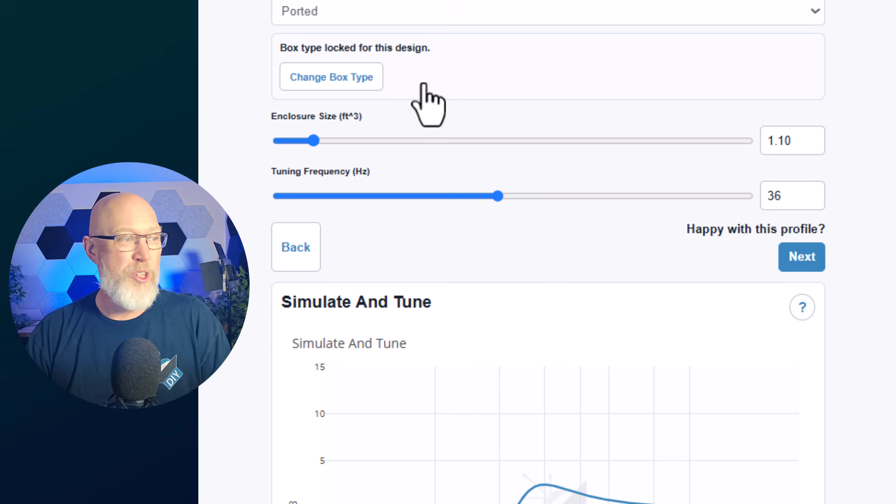If you're not sure if you've picked the right one, you can always just click on one of these links right here and it will take you to a vendor page where you can verify that you've selected the right subwoofer. Then we hit next. That puts us in step 3 where we can simulate and tune the subwoofer. We can choose a ported or a sealed enclosure. I'm going to go with a ported enclosure because this is an Aero-Port subwoofer enclosure tutorial, and I'm going to choose simulate and tune.

Then I'm going to take the enclosure size and I'm going to bump it up, and as you bump up the enclosure size, this graph right here goes up, so the subwoofer is getting louder as the enclosure gets bigger. I'm going to go with 3 cubic feet for a pair of 10-inch subwoofers, and then take the slider right here and I'm going to tune it a little bit lower so we can get some low-end extension. The thing to keep in mind about this is as you tune lower, the ports are going to get longer, so maybe more difficult to fit the port in the enclosure.

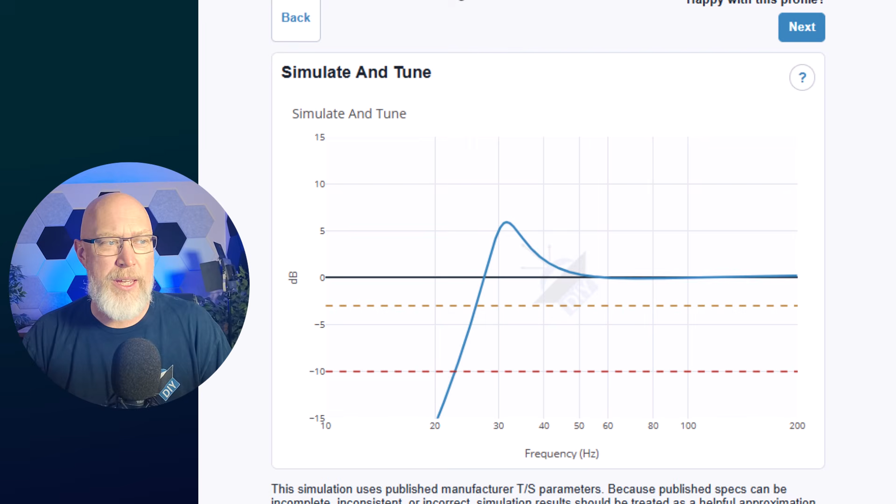As the box gets smaller, the port will get longer. That makes it more difficult to put the port in the enclosure. So what I recommend that you do is oversize the box a little bit so you can have room for your port, and maybe you'd like to tune it to 30 hertz, but maybe back it off just a little bit so you can make sure that you can fit the port in the enclosure later.

Then we hit next, and now we have this screen right here, which has given us a power estimate. This is 80% of the rated power of the subwoofer. We can raise or lower that if we want to, but the standard is to use 80%. And then we have a port area in square inches. The thing to remember is as the port area gets bigger, you can see here on the graph, your port velocity goes down. So you want a large port to prevent chuffing.

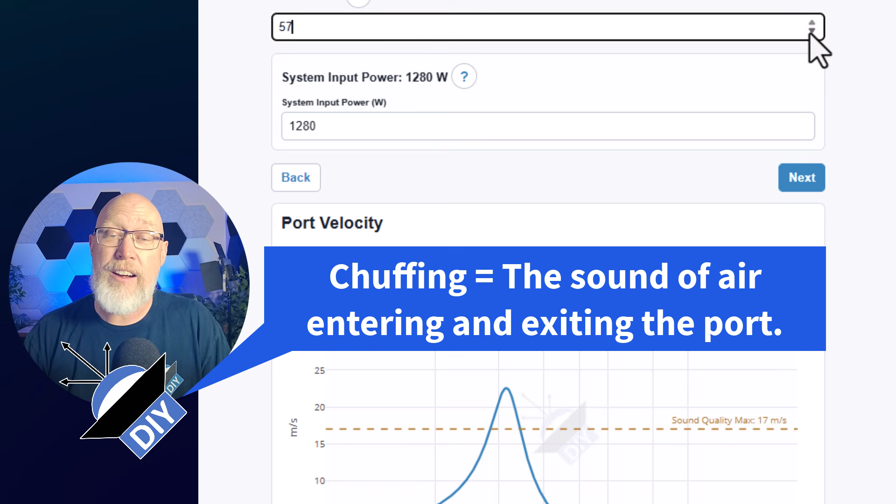But we're using an Aero-Port, a flared port. And the beauty of a flared port is you can get away with a higher airspeed velocity without having any audible chuffing. The general rule of thumb is for sound quality, you want to keep it below 17 meters per second. For your daily driver build, you want to keep it below 34 meters per second. And with an Aero-Port, you can double those numbers. So you can lower the area of your port and get away with a higher port airspeed velocity. That is the beauty of the Aero-Port.

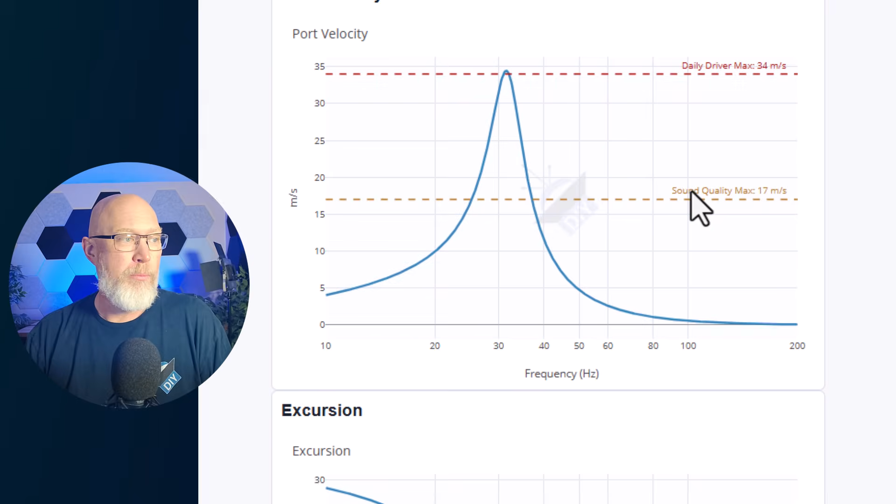Below that is a plot that shows your excursion. We're interested in this point right here, which looks to be about 26, 27 hertz. So any frequency below that, our subwoofer is going to go beyond its X-max and we might hear some distortion. That's easy to fix. We'll just turn on the infrasonic filter on our amplifier. Almost every subwoofer amplifier has an infrasonic filter.

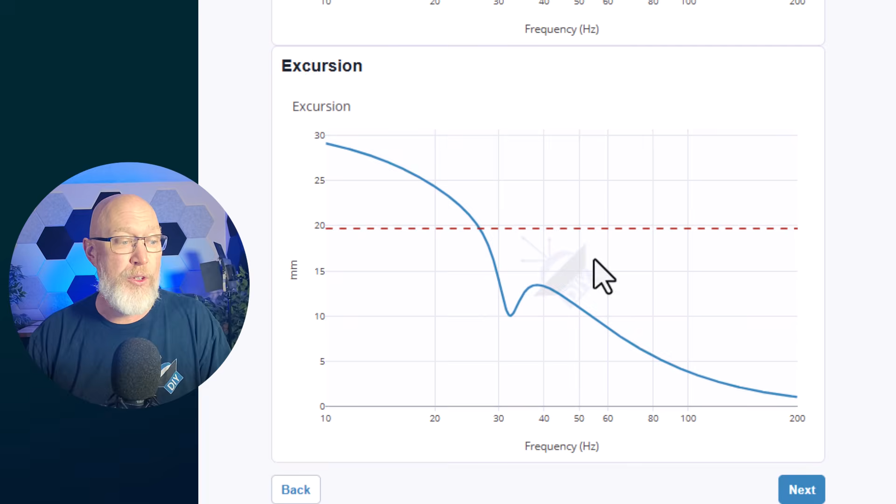We hit next and we get a nice summary page of what we just saw, along with an SPL plot, our excursion plot, and our port velocity plot again. Key numbers on this plot right here. The most important one is the F3. That's the point where we're down 3 dB from flat. That's going to be at 26.7 hertz. This screen's also going to show us a port length, so we're going to need about a 23.5-inch long port. That's important information because we're going to have to decide on a width of our box.

So let's hit next, and that kicks us into stage 2 of this system. Stage 2 moves us from simulate and tune into building your blueprints. So we're going to go through a simple step-by-step process. When we're done, we'll have a set of blueprints in our email inbox. We have 4 options here.

We have 2 slot port options, and then we have 2 side firing round port options. We're going to go with the Aero-Port option. I'm going to double up on the baffle because I just like doubling up on the baffle. We have spacing options. We can space them tight together or we can stagger or offset them, but the system is designed to override our spacing options if we have to make the ports fit in the enclosure. So all that looks good to me.

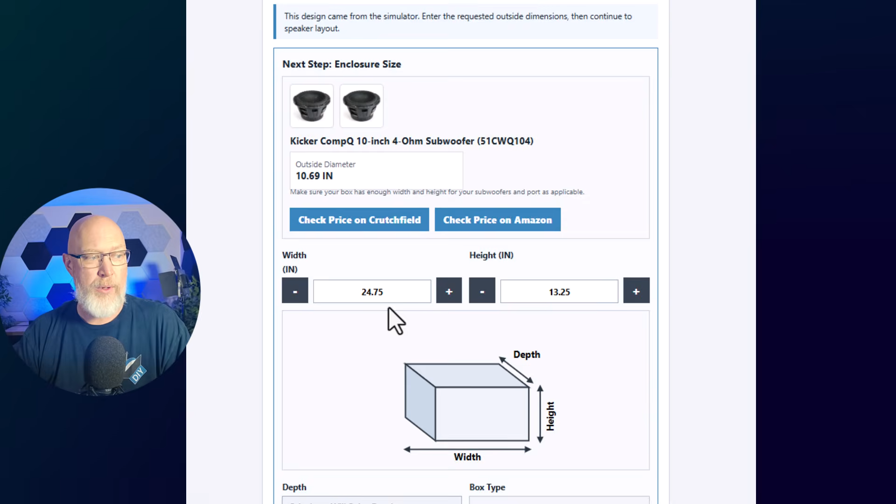I'm going to hit next and enter my enclosure size. It's already defaulted to a width and a height. Those are just guesstimates. They mean absolutely nothing. I know I'm going to need more than 2 feet in the box, so I'm going to go ahead and bump that up to 30 inches. My subwoofers are 10.69 inches in diameter, so I know I need to have 11.5, maybe 12 inches at a minimum to fit the subwoofer. I'm actually going to go with 14 inches.

The airspace came over from Simulate and Tune. We can adjust it now if we want to. The tuning frequency was brought over from Simulate and Tune. We can adjust that if we want to. And the port area in square inches was also brought over from Simulate and Tune. Again, we can adjust that if we want to. The system has estimated the amount of airspace that our subwoofers displace in the enclosure, and this system is designed to take that into account, as well as the space taken up by the ports and any bracing you might add to the enclosure. We hit next and we wait and see what happens.

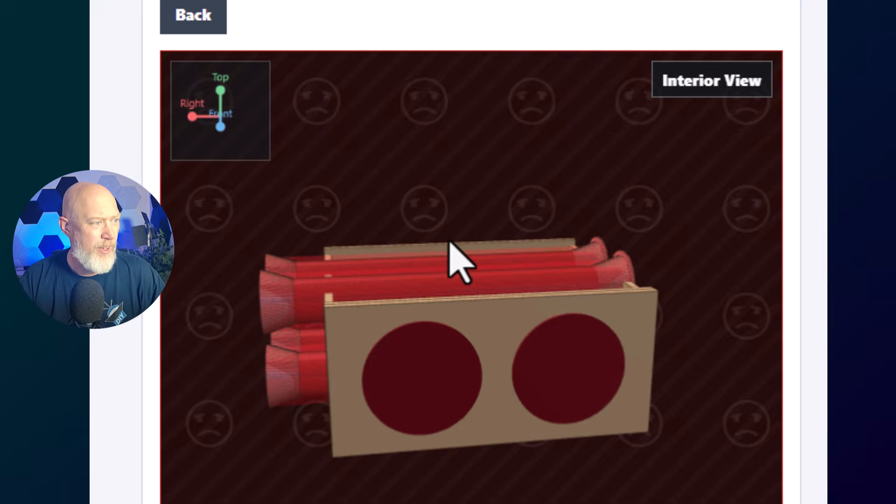And we have a problem. This system is designed to catch problems. The issue here is that even though we know we need about 2 feet worth of pipe, we're going to be putting big flares on this pipe, and those flares take up extra space. So we don't have a box that's wide enough to fit our Aero-ports. And we get a nice 3D visualization of that, and we can see the ports sticking out of the enclosure. This tool is designed to give you the information you need in order to solve this problem, and one solution is, instead of using 4 4-inch ports, to try 1 6-inch port. So we can just choose 1 6-inch port. Now if we go with that option, we're only going to get 28 square inches of port area.

Let me back up and explain what's going on. The system tried to put 4 ports inside of the enclosure, and when you put 4 ports inside of the enclosure, each port is going to tune 1/4 of the enclosure, meaning each port is only going to see a very small airspace. And as the airspace gets smaller, the port has to get longer. So those ports ended up excessively long because there were many of them, which meant they couldn't fit in the box. The solution is to use 1 larger port, but there was a big trade-off to switching to 1 larger port. That 1 big port didn't give us the cross-section that we were hoping for. So we had to make a choice.

And while that might not be an optimum design, that does tell us something really important about designing subwoofer boxes and life in general, and that is that there are no solutions. There are only trade-offs. There's no such thing as a perfect subwoofer box. What you can do is get the best box possible given your set of constraints. That's the design philosophy behind this tool. You input a set of constraints like the width and the height and the airspace and the tuning frequency, and this tool will give you the best box possible given those constraints, which is less than we wanted, but it will fit in the enclosure.

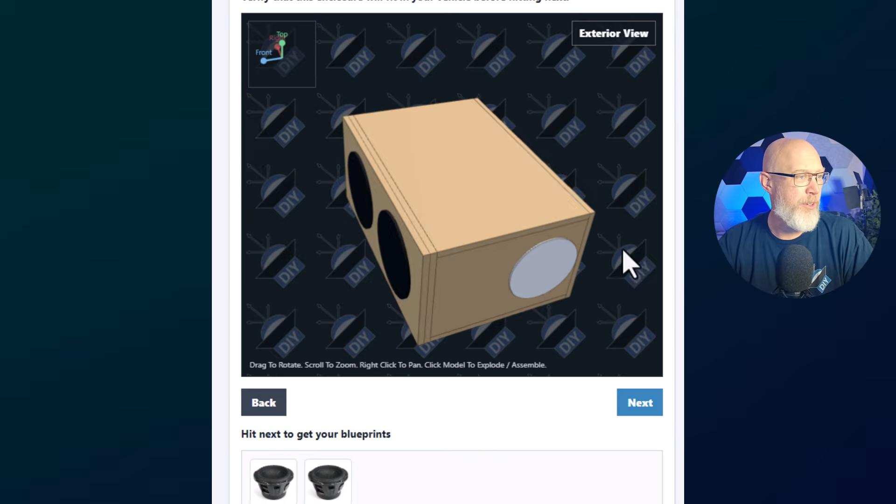Before moving on, I want to point out the dimensions of the enclosure. It is 30 inches wide, 14 inches tall, and 21.25 inches deep. So before you go to the next step, you want to make sure that this subwoofer box will fit in your vehicle. If it won't fit in your vehicle, then don't move forward. Go back and try to design something that will fit in your vehicle. Let's hit next and see what happens.

The system is going to email the plans to you, and in just a minute, those blueprints will show up in your inbox. Before we look at the plans, stop and take a look at the timestamp on this video. The design phase took just a couple of minutes. If you were to try this with pencil and paper and a calculator, it would take you hours. Let's check out the plans. Here are your plans.

Now that you've got your plans, you want to make sure you take some time to make sure the plans make sense to you and that you know what to do before you start cutting wood. Because the worst outcome is to cut wood and build something that doesn't work. So let's scroll down through the plans and take a look at them.

The first thing it's going to give you is a project overview. Review all of that and make sure it is what you are looking for. It's going to give you some 3D views so you can get an idea of what it will look like once it's assembled. It's going to list your subwoofer

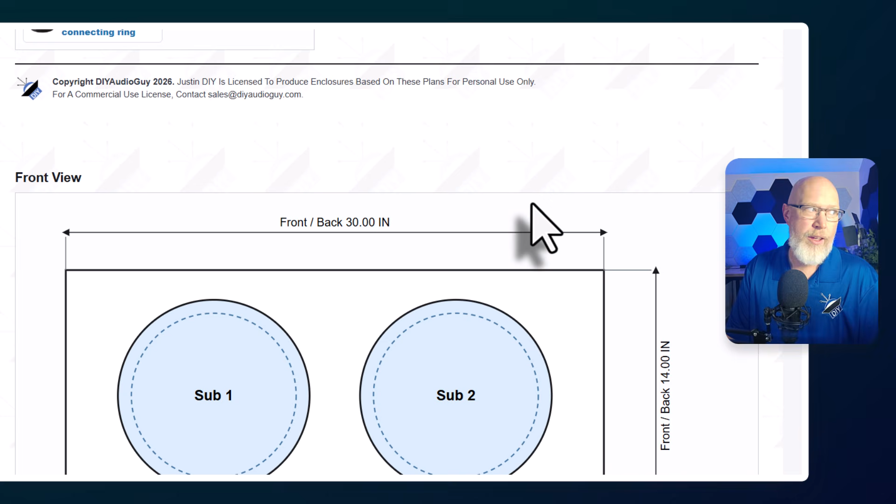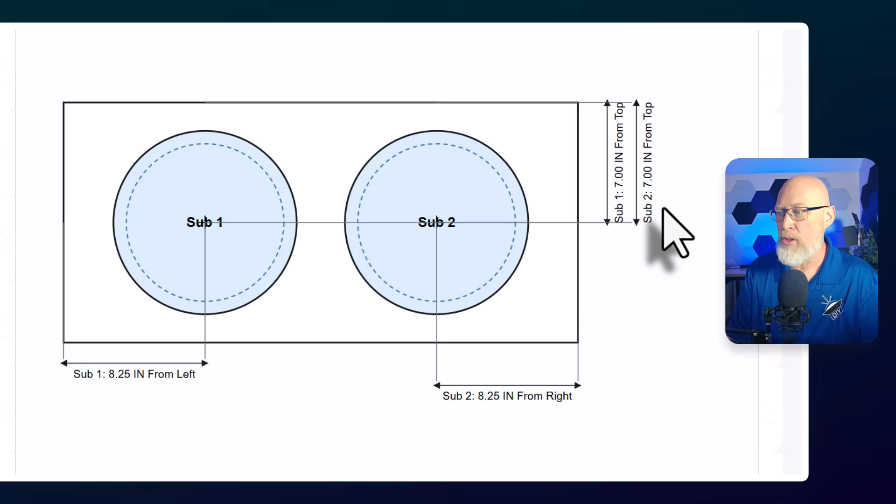The first thing it's going to do is give you a front view and it's going to show you the size of your baffle. In this case, we're going to have 2 baffles, so there'll be 2 30 by 14 inch pieces. The next view is going to be the exact same view, but it's going to show you suggested speaker placement. This is merely a suggestion. You can put these anywhere you want as long as you have room for them.

Before you cut the holes for your speakers, I recommend that you do a test cut on some scrap material. I have found that speaker cutout dimensions are oftentimes wrong, so double check them before you start cutting. That's the most important lesson of the day, is double check before you start making sawdust.

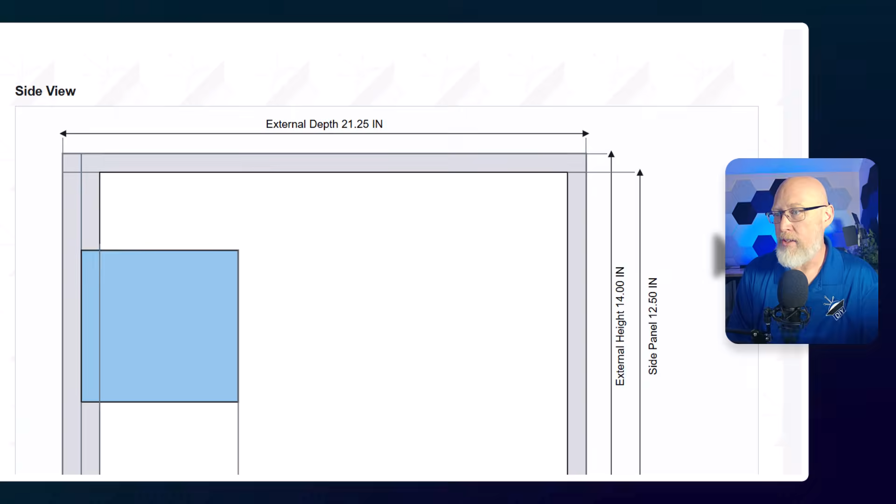This is the back view, and in this case the back view is exactly the same as the front view minus the speakers. It's a 30-inch wide by 14-inch tall panel, so you'll cut your back panel 30 by 14. Here is a side view. The side is going to show you the depth of the subwoofer into the enclosure. The gray area on the side view represents pieces that you can see when looking at the side.

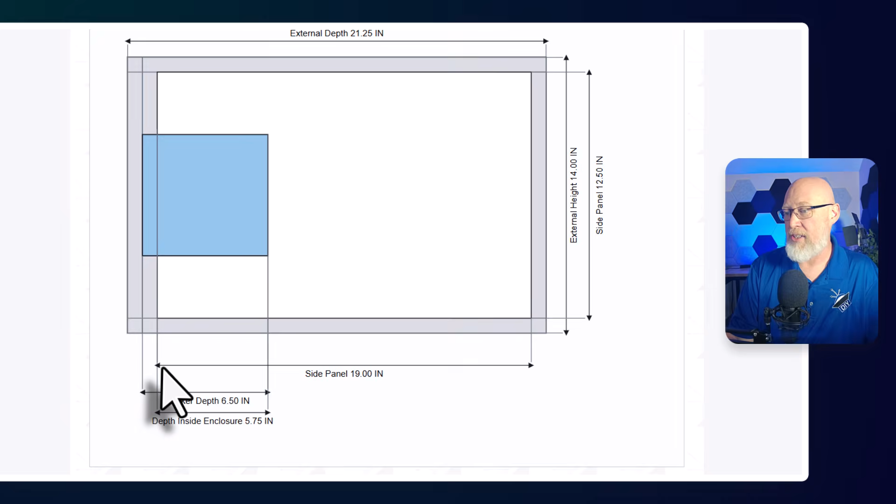The subwoofer is 6.5 inches deep, and it's going to plunge 5.75 into the enclosure because I'm assuming that your outer baffle is merely decorative trim so that you can recess the subwoofer. I like to do this because I think it looks better that way. The side panel itself is going to be 19 inches wide. This is the view from the top and the bottom. It should be two identical pieces of 30 by 19.

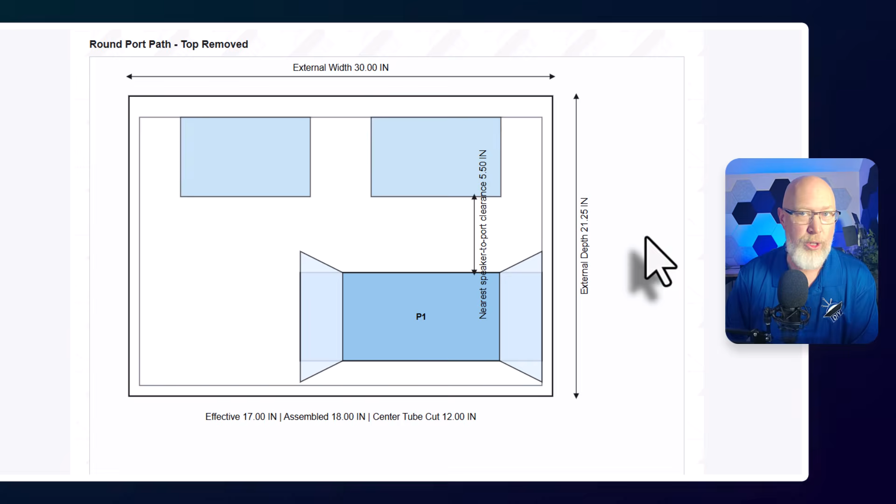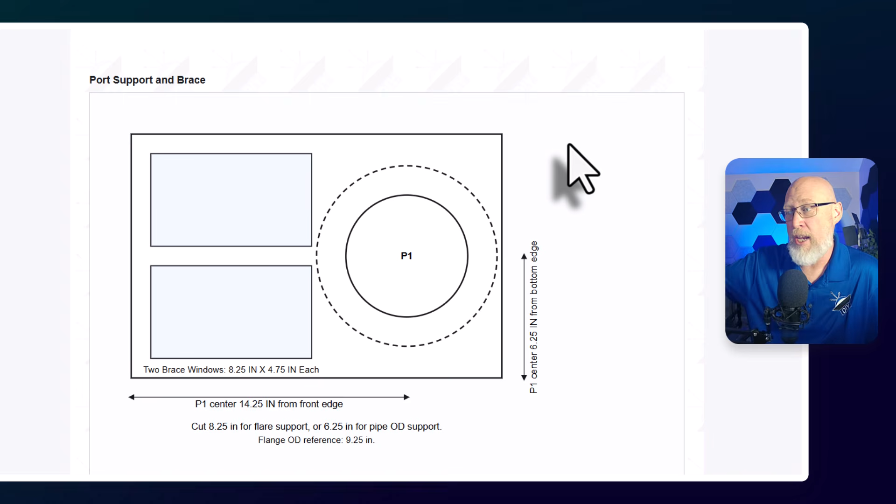Here is an example of what a brace might look like. This particular brace is designed to have two windows for airflow and then an opening for the port. That way both ends of the port are supported. Finally, we have a cut list. You want to make sure that the cut list and the dimensions in the plans all line up.

We have information for optional bracing. In this case, that port support and brace combination piece should be the exact same size as all of the sides. And what you'll notice when you look at the cut list is some common dimensions: 30 inches, 19, 19, 12 and a half. This cut list is designed specifically to minimize the number of cuts you need to make on your table saw when you're breaking down your sheet goods to build your subwoofer box.